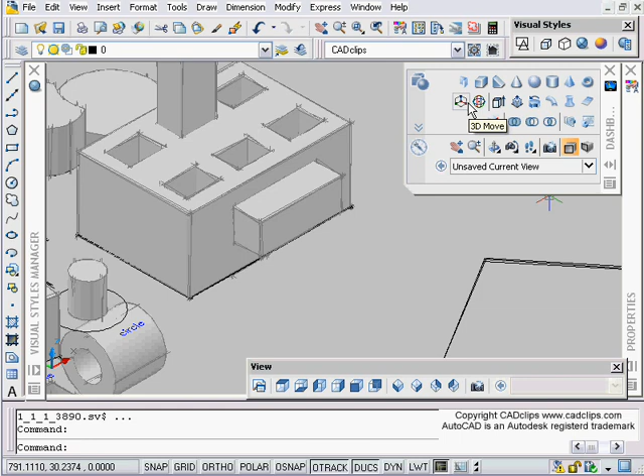Hello and welcome to another CAD clip talking about AutoCAD 2007 3D. Very much like 3D rotate, we're talking about the 3D move command here on my dashboard, where we can constrain our movement. We've had this type of command in the past but it never worked as nicely, and again it's another great tool in our arsenal of creating 3D objects with improvements in AutoCAD 2007.

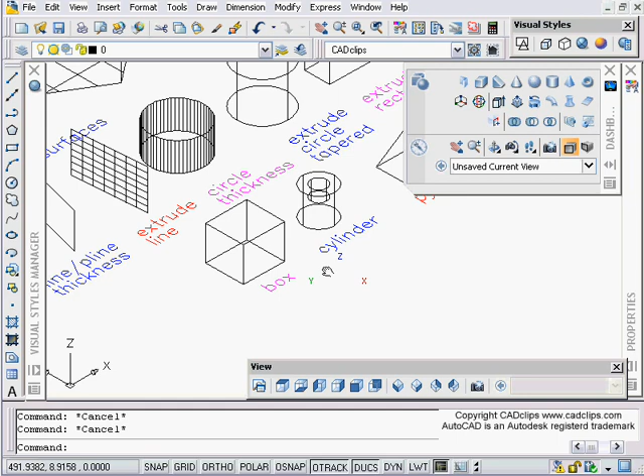The first thing I want to note is it works a little differently depending on visual styles. If I go to 2D wireframe and click on a 3D solid, I'll get some grips, but my icon down here isn't going to change. If I'm in one of the other styles, like 3D wireframe, sometimes this icon changes when you click on a solid, sometimes it doesn't. Let's just click on a line - even a line works, so it doesn't even have to be a 3D object.

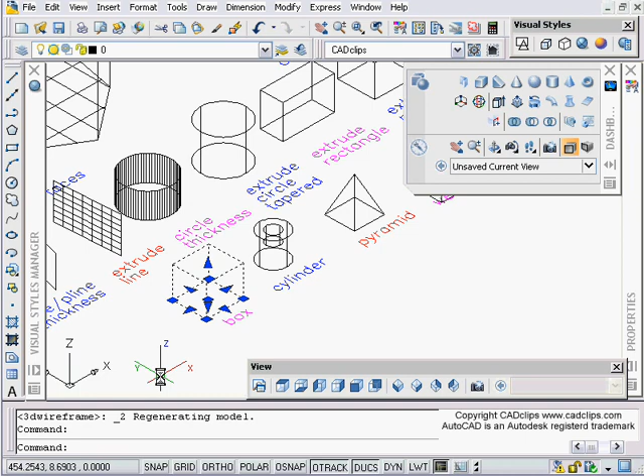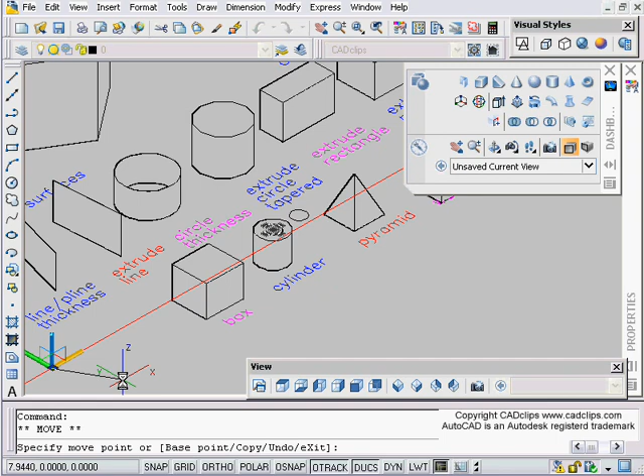So the first thing to talk about with 3D move, before we even push the button, is that if you're in 2D wireframe, you're not going to get this icon lighting up. Any of the 3D visual style options will work - let's go into 3D hidden line. If I click on an object and then go over to my UCS icon, if I click on one of these axes, it constrains it to that axis, not even by starting a command. You click on an object, hover over that axis, and pick.

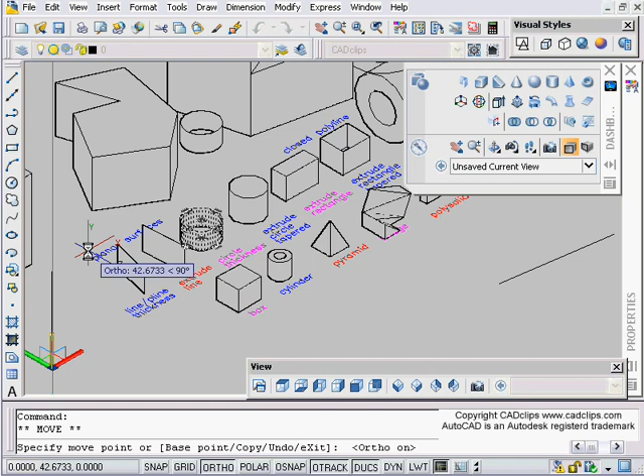It just happens to be a circle - I wanted to get the big mass element. There we go, notice the axis. Now I'm going to hover over this, click, and now I'm moving up, and if I just type a displacement like 10, it'll go up by 10 units in the air. So without even doing the 3D move command, you can move in 3D by clicking on an object, hovering over here, picking, and then moving up and down - you can also turn your ortho on and off. What I'm defining is the displacement distance.

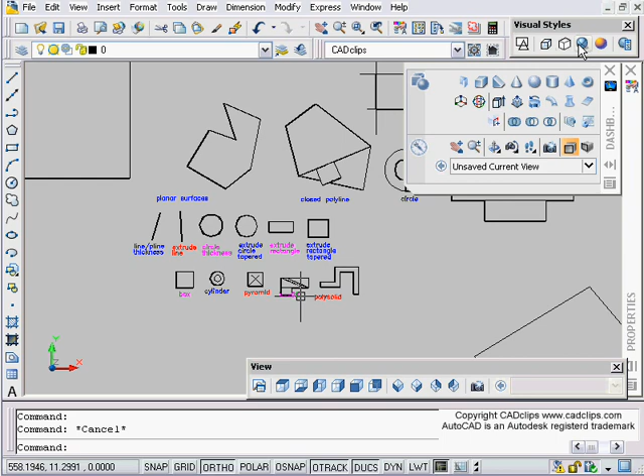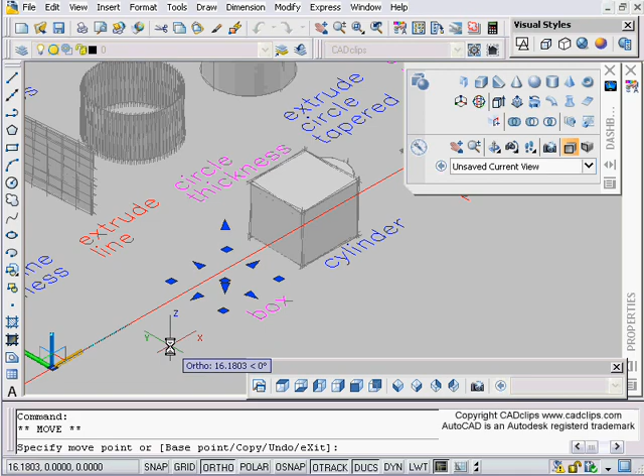That does not work if you are in a 2D wireframe. What happens if we're in a top view and we're in 3D? If I click on this object, will I get the same effect with my icon down here? I won't - it's not highlighting, telling me I need to be in a 3D view. Let's change myself to conceptual view and see if that makes a difference. No. So my viewpoint has to be kind of a 3D viewpoint for this to work: click on here, pick an axis, slide it along, and type in a number.

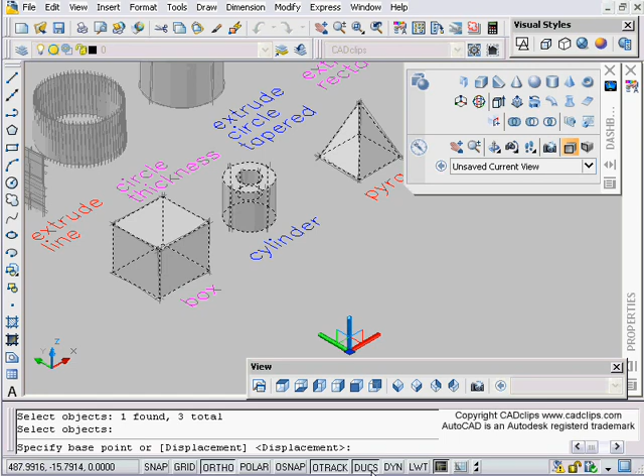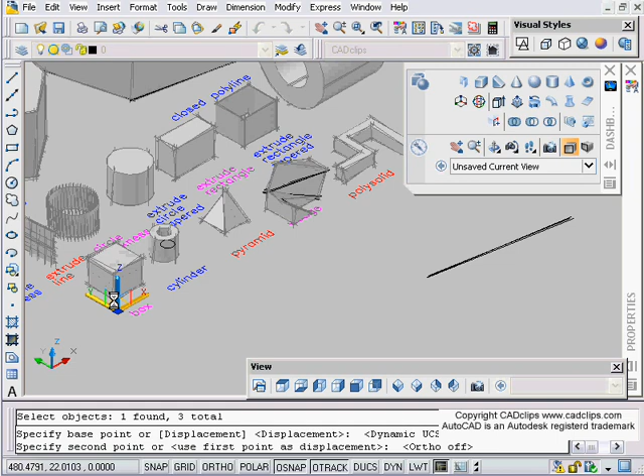That is really how the 3D move command works, except with the 3D move command we start the command and can select any amount of objects, just like a regular move. We hit enter, and now on our crosshairs we get this lovely constraining set of axes, combined with our dynamic UCS. Watch what happens: if my dynamic UCS is off, I can turn my osnap on and snap to a point, then move those objects based on that point. This is down flat, so I'm just moving it - nothing exciting there.

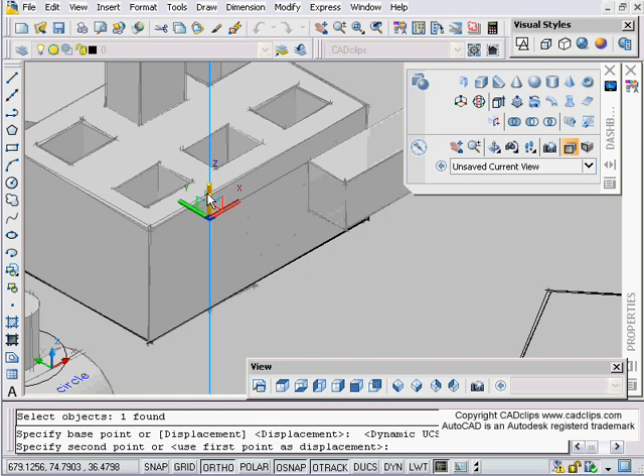Now, if I hover over an axis, I can pick, and then move up and down, or I can type in a number. Again, 3D move, pick the objects - let's go over here, let's take this guy. One thing I want to do: 3D move, pick this mass element, hit enter, and now as I'm going along here, notice I undid my UCS. If I don't turn on my dynamic UCS, I can use osnap to pick that point anywhere I want, then hover over here and select the axis I want to constrain it to, and then type in a number. Very, very handy.

Now I can go back again, do my 3D move, pick on my object, hit enter, and now if my dynamic UCS is on, I can actually hover over objects, and you'll see that it will actually pick up the plane those objects are drawn on. Maybe take my O snap off while I'm doing this. Notice that as you're moving around, it's letting you select a plane because I'm using my 3D move in combination with my dynamic UCS.

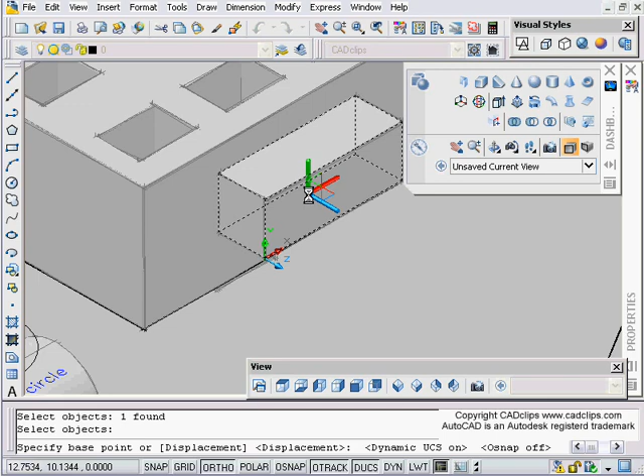The key here is, you see I'm hovering over here, it's telling me this is going to be the plane on which I'm working, and then once you start to move, you can go in here and pick the axis you want to move along. Then you type in a number, and we're using our object snap and our ortho.

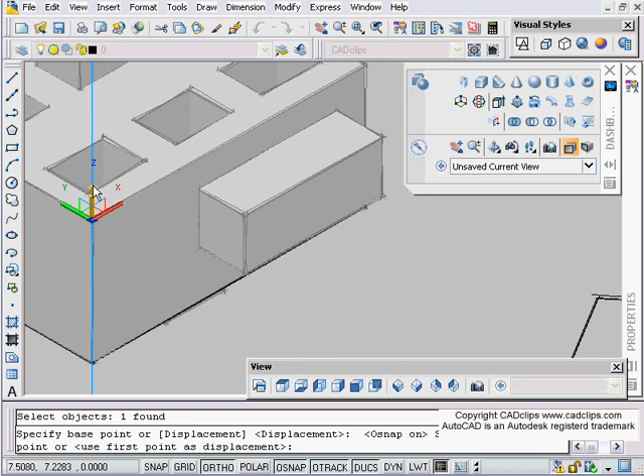So doing this, we're using a combination of our 3D move, selecting an object, enter, we're using our dynamic UCS, and we're also using our ortho, and we can use our O snap down here as well to select a point we want to move along, and then after we start to move, we can pick which axis we want to constrain the move to and then type in a number.

The other thing I noticed while preparing for this lesson is a difference here. I wanted to show a little bit about the push-pull. Notice I had a separate object there. First I went in and used my dynamic UCS, drew a rectangle there, and then used my push-pull and pulled that out.

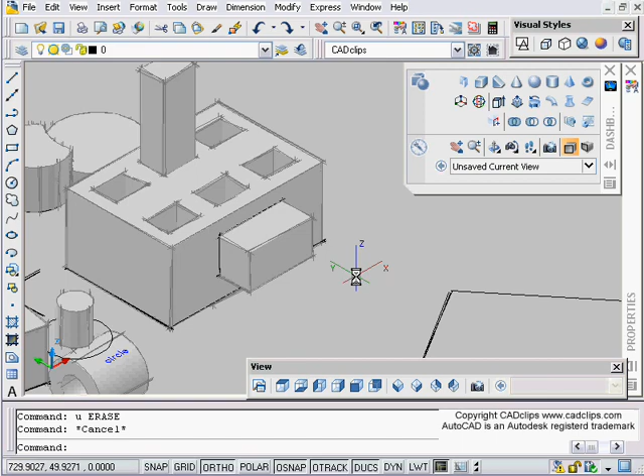One thing I want to note is that when you do that push-pull, that is all part of that one object. If I erase that, if I move this, that all gets moved as one object, because I did a push-pull off of that surface, as opposed to drawing a rectangle and push-pulling it.

Go right in here, use the box command using my dynamic UCS, turning my ortho off and hovering over there. Oh sorry, let me try this again. Box, hover over here, click.

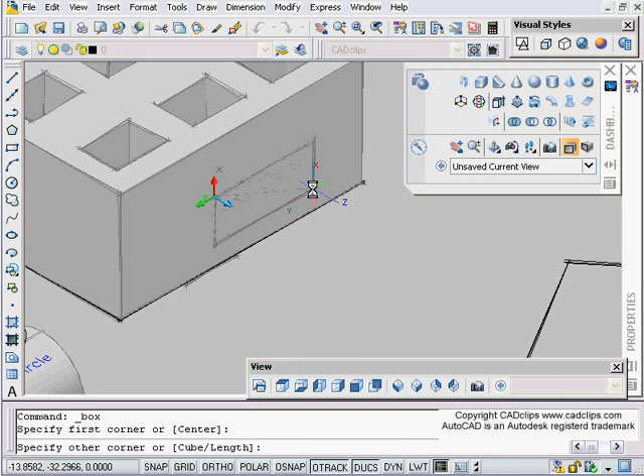And then, oh, I'm still getting the wrong surface. Here, there we go. Click, and then pull. Okay, let me do that one more time for you.

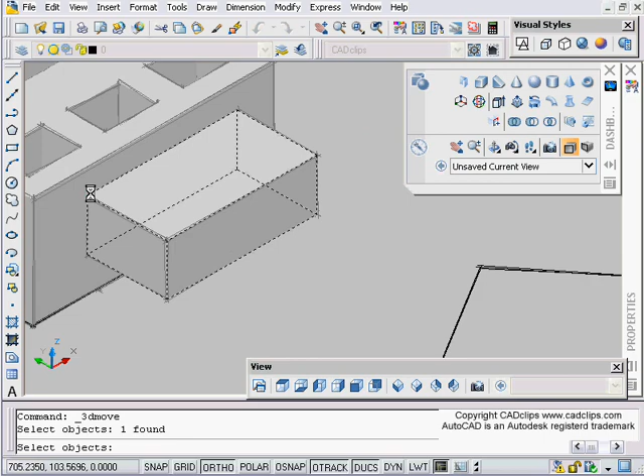Using my dynamic UCS and the box, hover over here, make sure you're getting on the right plane. You can see the outline, and sometimes it's easier to change your visual style. Pick, and then pull. When I go to do my 3D move, enter, pick, this is a separate object, is all I'm saying. So when you do your push-pull off of a surface, it creates the new object as part of the original object of the surface it was dragged on.

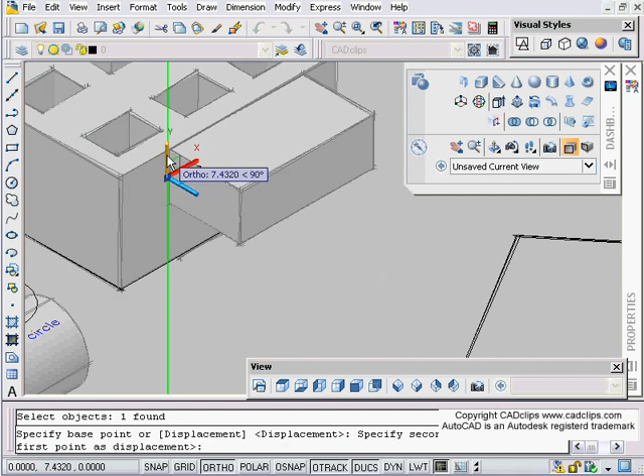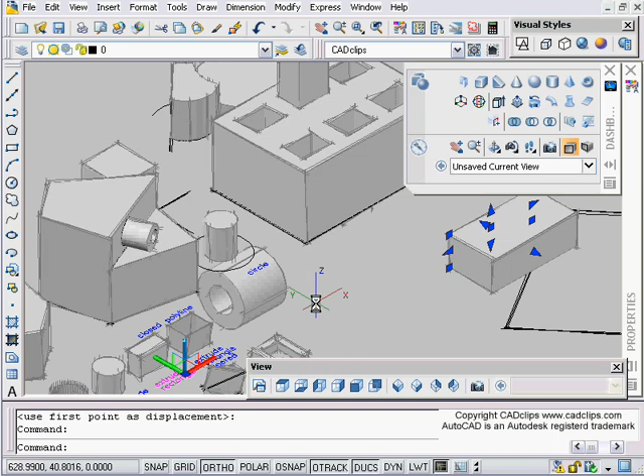So maybe do a repeat of that exercise. Whenever we see these axes, before we finish our placement, we're free to pick an axis we want to drag along and then place that out. It's a lot easier to move things, especially when we are in 3D and want to take those objects and slide them along without using our X, Y, and Z point filters, which is what we've used in the past.

Again, you can use your object tracking to drop in nodes and use your object tracking, use your object snap, use your polar, or use all of these, including DUCS, with our 3D move command.

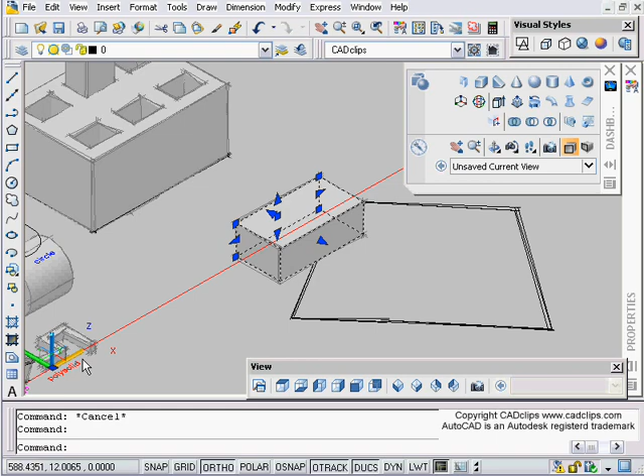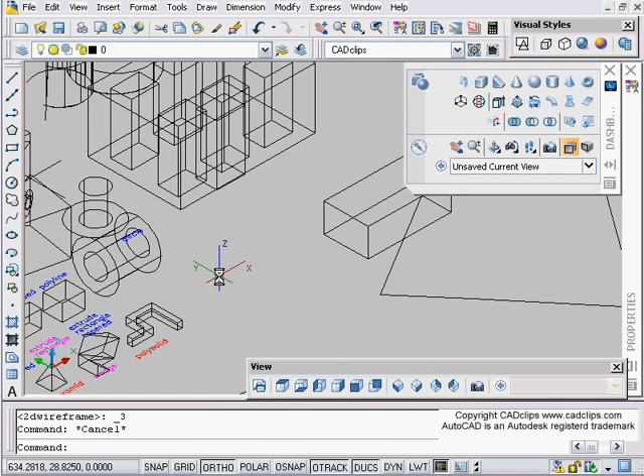Or, as I said in the very beginning, as soon as you click on something, you don't even have to say 3D move. You can just pick an axis and slide it, as long as you're not in 3D mode or 2D wireframe. So there's our 3D move. Works a lot like our 3D rotate, where we can constrain it to these nice little visual axis that Autodesk has built in there for us.